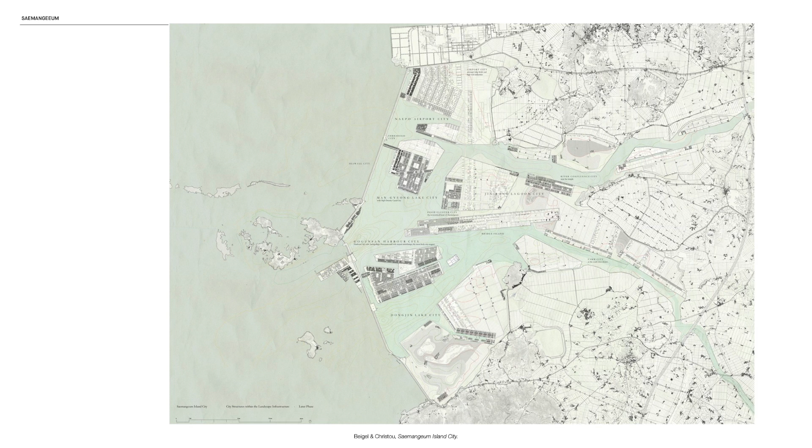Another example, very different, is this Saemangeum Island city in Korea by Florian Beigel and Philip Christou. It's a project for a metropolis in Korea, a new metropolis, and they work with the idea of the island. They took really to the extreme the idea of an urban island, not really as an enclave or as a space with a neighborhood with a character, but literally a floating island.

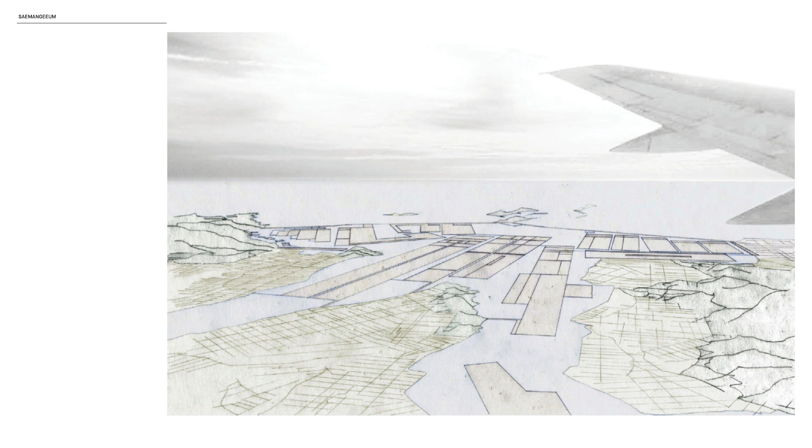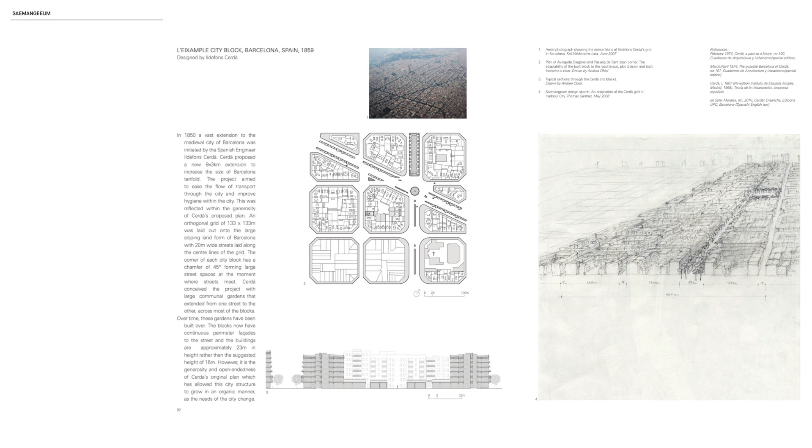So this is within the area of a seawall, which is the external wall, the bigger one you see, and then all of the areas in between. It's a kind of very long-term project of creating this new metropolis, and obviously to plan or recreate that large, massive scale puts you in a situation of how to generate the necessary lively but complex fabric or pattern.

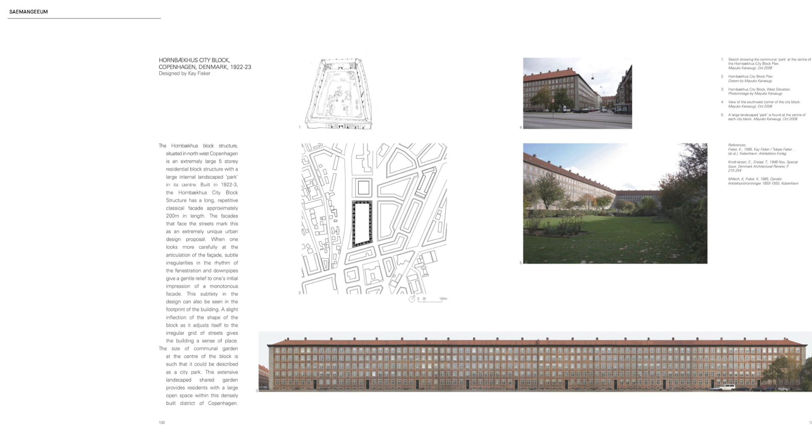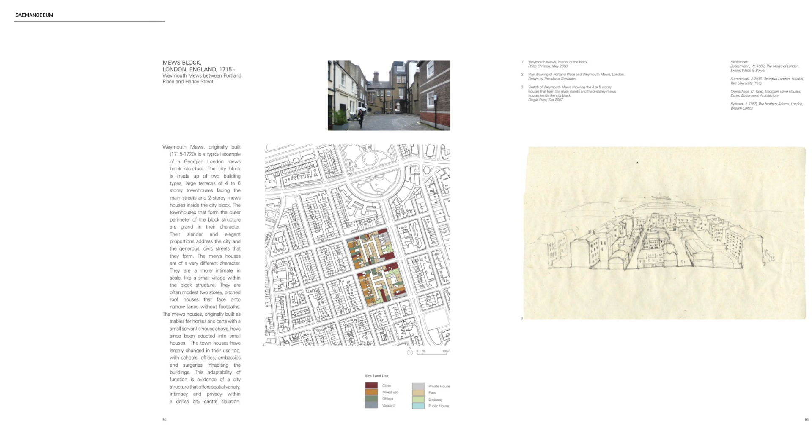How to provide a general layout that can assume the inevitable complexity in the long term. So how to generate complexity without being extremely arbitrary nor random. Basically, what they did was a pretty extensive research project of mapping different fabrics or patterns, urban patterns with very distinct characters, from the grid of Barcelona to Copenhagen city blocks, and several in England. So choosing very distinct historical examples, like the mews blocks in London, that for some reason have been very successful or appreciated in one way, and have a very distinct character. And then really working with these measures.

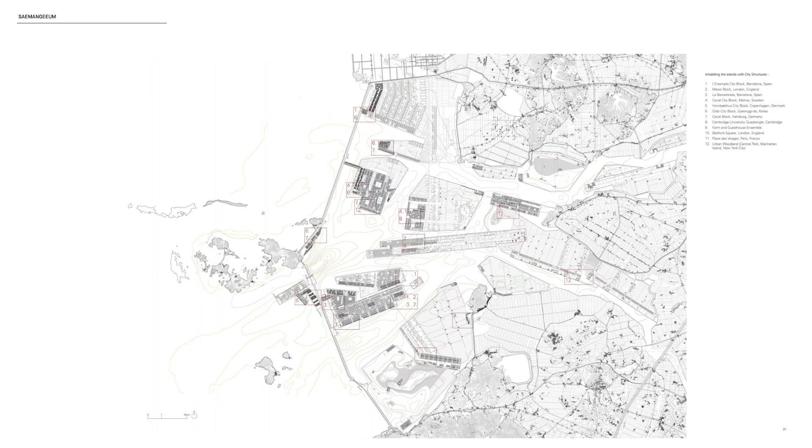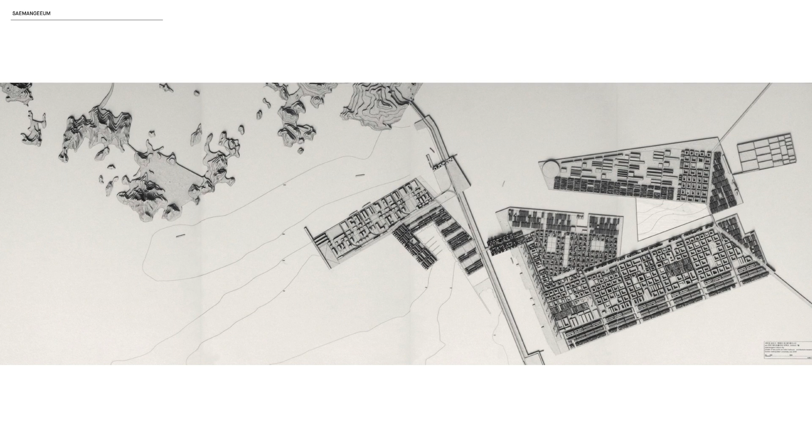So on the right-hand side you have the list of patterns, which you can't read really, but it's 12 different patterns. They assign this kind of layout to the different islands, creating these different characters, based on very solid identities, but again establishing a relation of complexity or difference with one another.

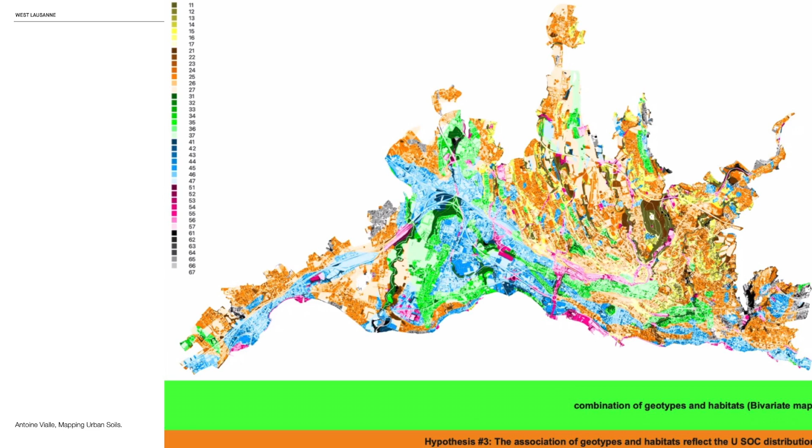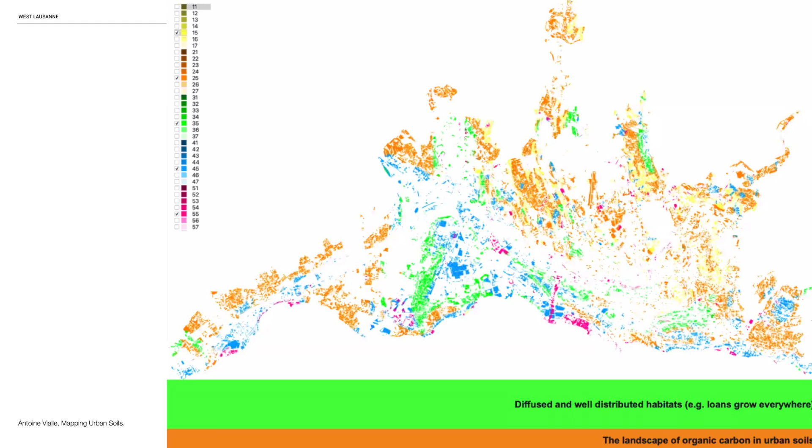A very different project, also ongoing and not even finished, is a research project in Lausanne at the Polytechnic University of Lausanne that looks at the metropolitan area of Lausanne through the analysis of the soils. Basically it's inverting the reading of the city through the qualities of the soil, in order to generate not only a land use based on soil qualities, but to use that as a CO2 capturing device. So to use the potential of the soil to capture CO2, and through this detailed mapping of the actual composition of the different elements and layers of the soil, have different potential strategies for CO2 capturing in the future.

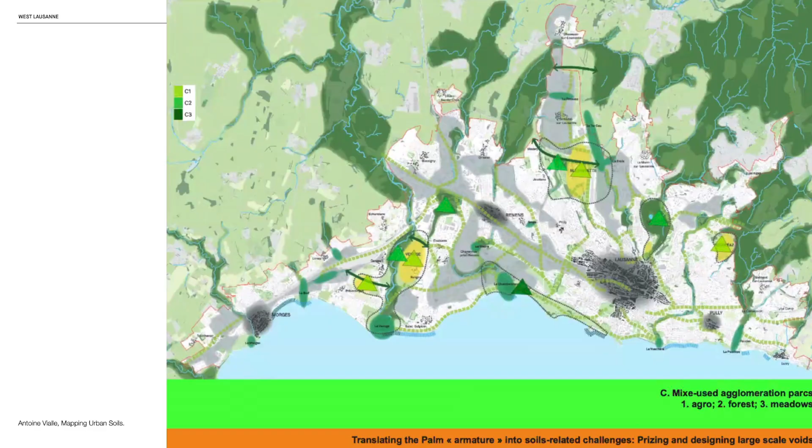I'll just flip through quickly, then eventually leading to different long-term interventions. Another example is the Brussels area, Flanders area, a project by Paola Vigano Studio, where she deals with the idea of what she calls a horizontal metropolis—two terms which seem to be in contradiction.

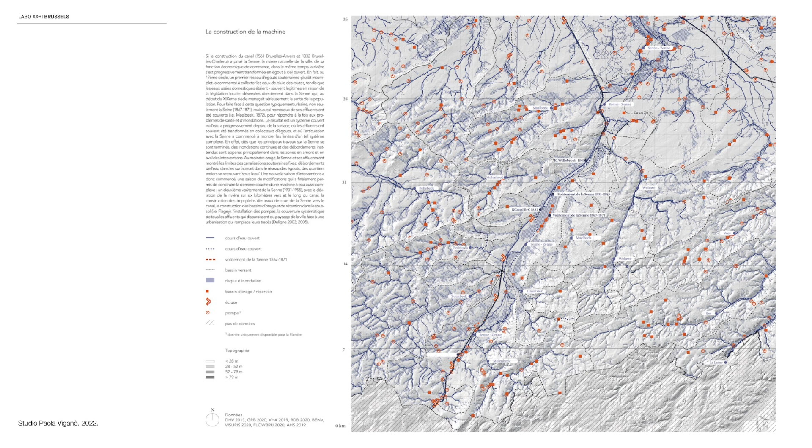Usually the metropolis is more of a dense, vertical agglomeration. Her argument is that the metropolis of today has this dual condition of being vertical and dense on one hand, and horizontally spread on the other. Again, trying to reconcile or bring together typically non-urban functions like farming, green, or rural space into the actual urban, through a very data-based, detailed understanding—from hydrological systems to other land use and ecological systems—trying to understand this horizontal condition of the metropolis, from its central dense core to its ramifications into the actual territory.

She then, after this analysis, put forward the idea of porosity, which she borrows from Walter Benjamin's study of Naples. Porosity meaning the intermingling or intertwined different functions you find in the streets of Naples, for instance—the blurring of thresholds, the public becoming private, and the superimposition of functions. She applies this idea to the region, trying to create a mixed, diverse, almost promiscuous mix of functions at the metropolitan scale. So it's a critique of classic zoning, applying mixed use into the metropolis, pretty much.

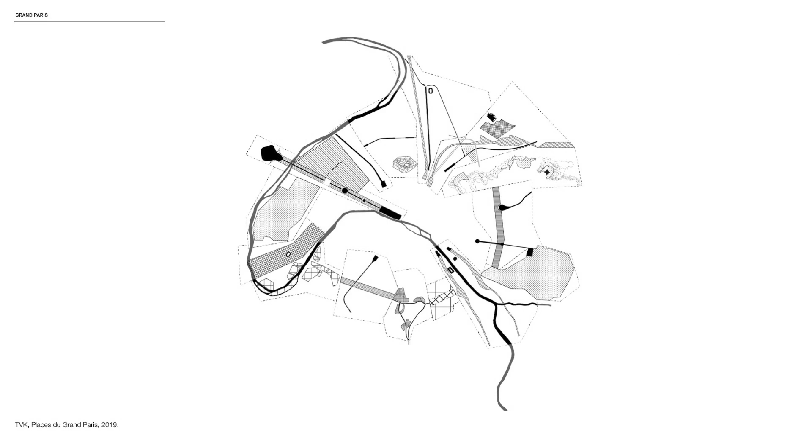Also, recently, the project for the Greater Paris, the Grand Paris, which involves several strategies—understanding that Paris is not just the municipality of Paris, but really the entire Paris region, or the Greater Paris as they call it. Paola Vigano also carried out the study, analyzing the functional complexity or functional mixity at the territorial scale of Paris, trying to mix this kind of mapping—plan, section, zoning—which offers a very rich, nuanced image of the territory. More specifically, the project for Greater Paris is connected to a new ring subway line, which will tie together suburbs and peripheral areas that are, at the moment, quite segregated or isolated.

This great project to really bind together the difference is done through a lot of emphasis in public space around metro stations or subway stations. This is a project by TVK, an office in Paris, carrying out an analysis of the identity, the character, the features of all of these peripheral areas, and trying to bring them together into a larger interconnected system, which operates at a macro scale but also gets to the ground, to the detail of the architecture of public space around these subway stations, as a space of social cohesion.

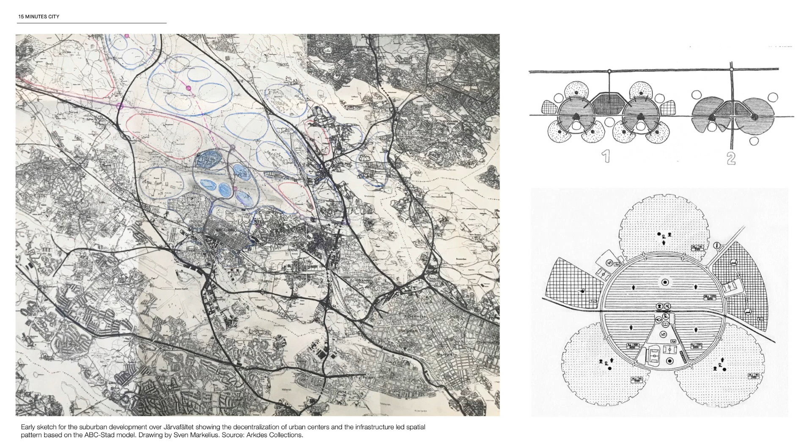But actually, I would claim this idea is not new at all, but has been repeatedly tried through modernistic planning. It's one of the main features of some type of modernistic planning, like for instance the ABC city, ABC-stad in Stockholm, which was the urban model that built the entire metropolitan area of Stockholm, published for the first time in 1952, based on a multifunctional core that could be replicated in the suburbs along public transport network lines, or later automobile lines, creating these bubbles or clusters of functions spreading into the territory. The idea was that ABC stands for

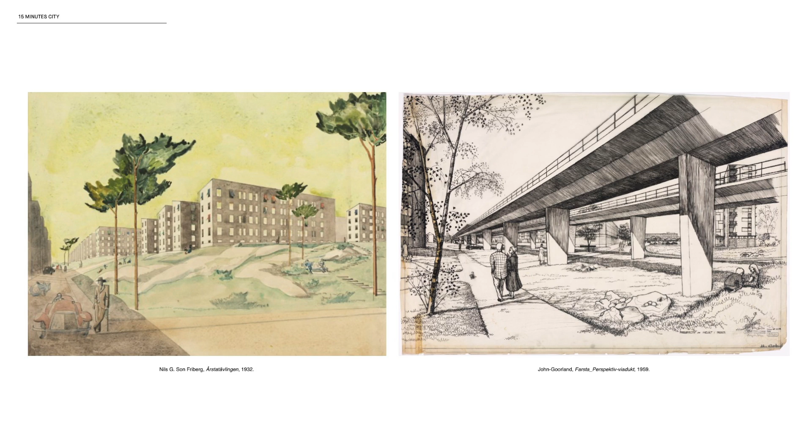living, working, and center consuming. So it was an idea of having within each of these bubbles the space of dwelling, the space of work, and the space of consumption or public function. So pretty much the 15-minute city already tried out. And what eventually this model generated was an extreme segregation between different neighborhoods or clusters, which were very bound together within themselves, within this idealistic logic of community, but very much separated apart between neighborhoods.

And I would claim that if you go even further back in time to the beginning of the lecture, Cerdà's plan for Barcelona already proposed some sort of 15-minute city in a very different and much more integrated, distributed system. But the classic understanding of the city block as one entity actually misses the endless variations that Cerdà was envisioning in his grid, which was in a way a game board where the blocks could be combined in many different ways.